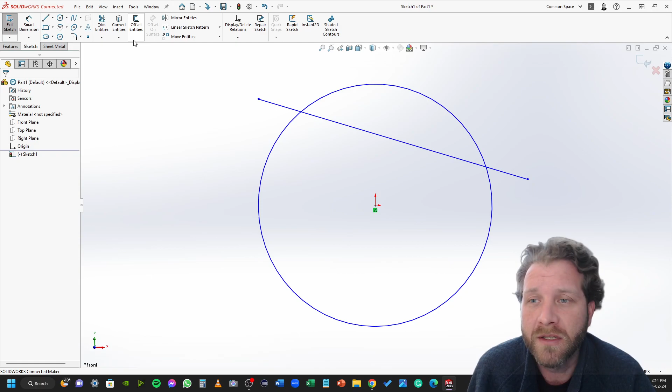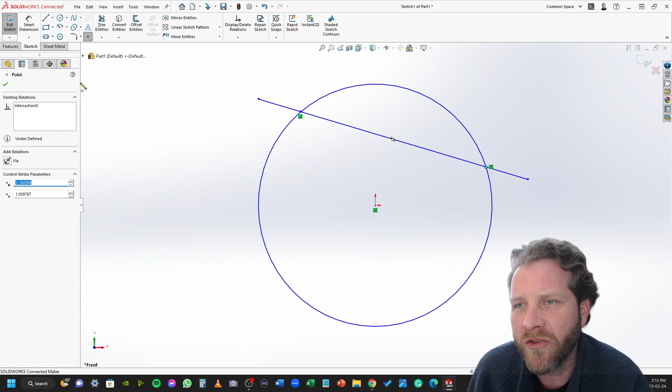So what's this doing? It's creating two intersection points, and these are critical to the process. If you want to use a center punch in your metal to designate those two spots, center punch probably being one of the most accurate, then that's what you'll do. You'll punch those intersections. And then the key thing from this point is that we're going to take our compass, or in this case a circle, and we're going to draw

a circle. Now, if you're using a compass, you're not likely going to draw the whole circle, but this is just showing you what would come from drawing the whole circle. You would probably only show about here and here. Then using that same compass, not changing the radius, draw it again. So just to be sure we're accurate as you would be in the real world, we're going to make these equal.

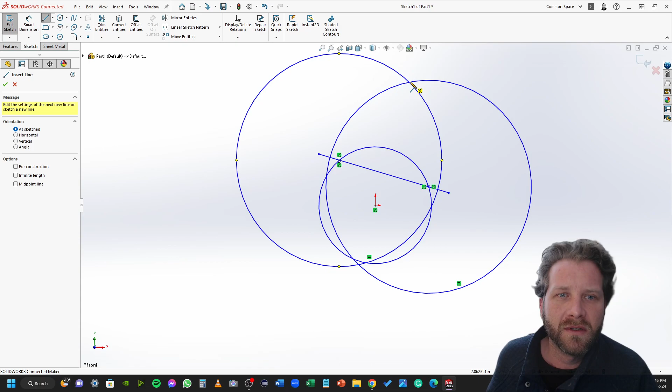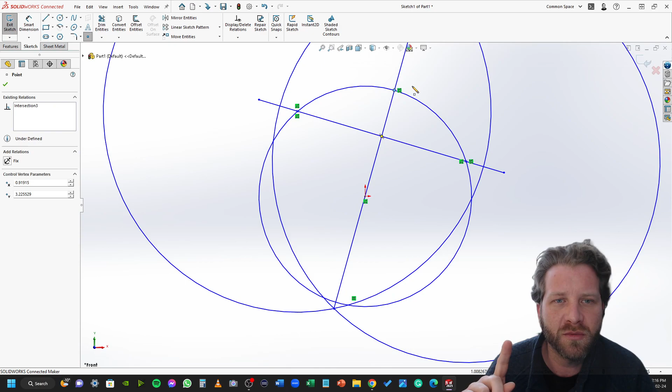Okay, so we've got two new intersection points that come from our arcs, our radiuses, our circles, which is there and there. So we've got a line now that's on center of the circle, but we need another line, don't we? Yes, that's right, we do. So we're going to define two more intersection points on the circle, one here and one here. Okay, so then we're going to do the same thing.

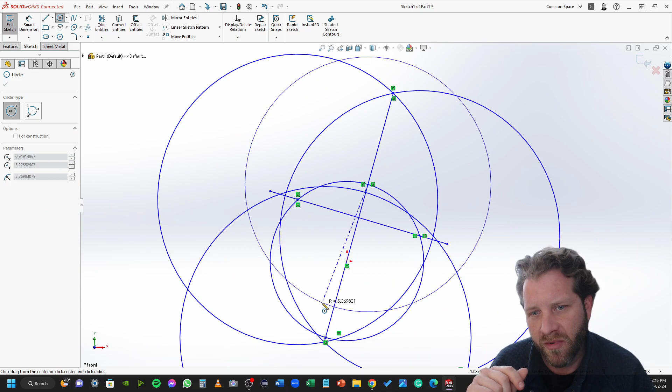All right, so we're going to draw two more circles. Typically you're going to want to make that radius, or diameter, bigger than your original shape. And we've got to make sure these are the same size. Again, if you're using a compass, trammel points or something of that sort, you're just not going to change that dimension between drawing your circles or your radiuses or your diameters. Okay, so that creates the same thing again.

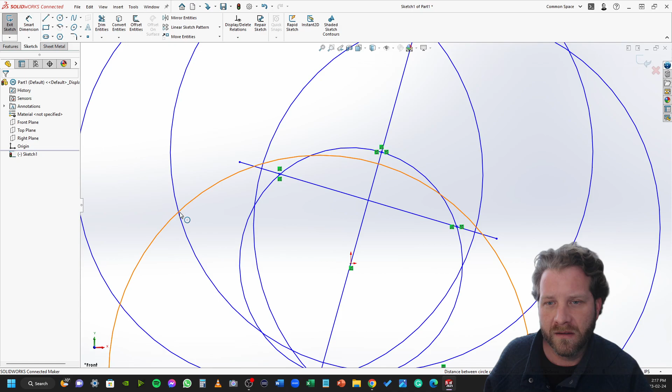We've got our intersection point here and our intersection point here. So now we have the center of the circle. How cool is that, right?

In other videos, I'll show you how to do layout of holes and how to divide a circle into certain degrees and all that stuff. But I think this was a good start point of something really basic; there's going to be cases where you may need it.